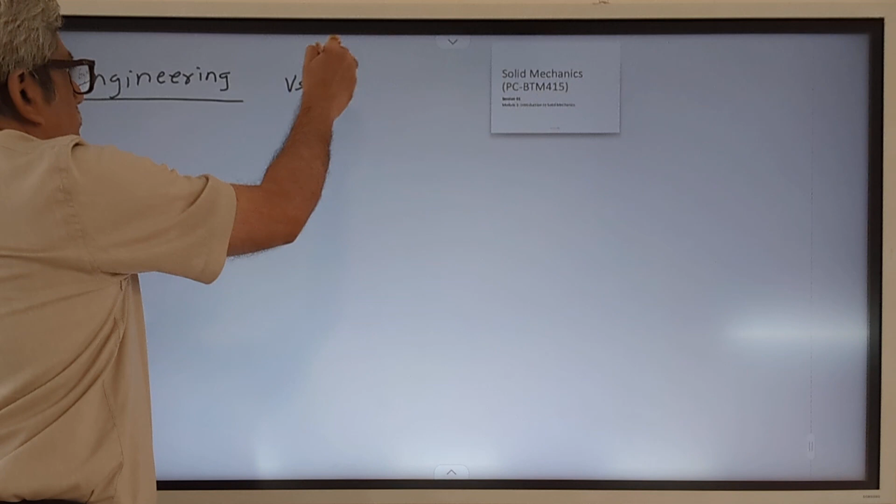So to make you think clearly, let's compare engineering versus any other profession. Let's take for example a chartered accountant. So how is an engineer different from a chartered accountant? Both are professionals - you are engineering professionals, they are finance professionals. So what is the difference? What do you learn that is different than CA? For example, a CA could be anybody. What can a CA not do that you can do, or what can you not do which a CA can do? So here we will focus on what you can do rather than what you cannot do.

Anyone who has joined and done 3 semesters, that is almost 1/3 of engineering. So what does an engineer do? You can design a machine. That's right. Okay, what else can you do? Here we are talking not about mechanical engineer, but engineering as such. We'll come to mechanical engineering after that, and after that we'll come to solid mechanics. So first we should know the top level. So engineers can design, that's correct. What else do we do?

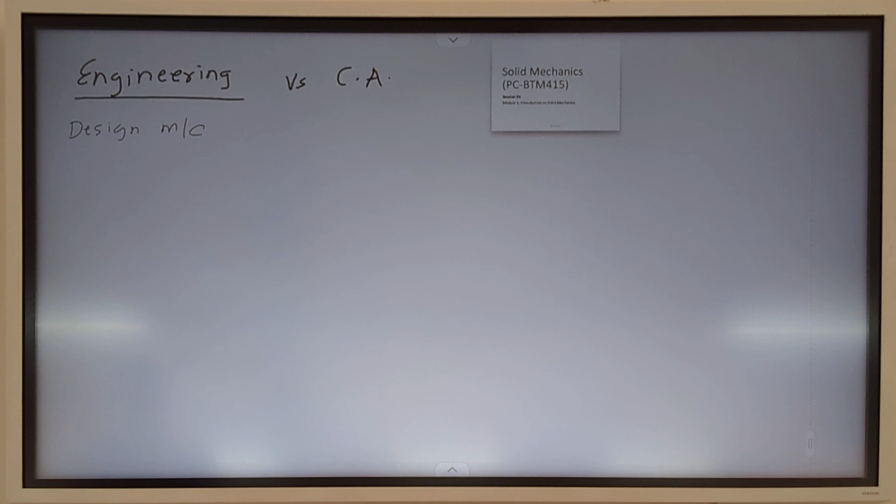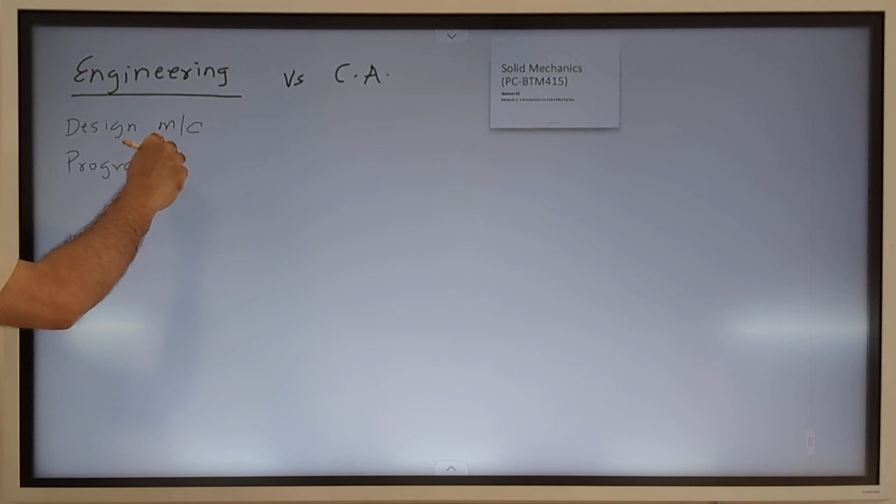Programming we do. Okay. Nowadays programming is a skill. If you call it a skill, it is across all disciplines. Here also we need programming.

So what do you deal with and what does the CA deal with? As I said, designing machines - we are dealing with machines. What else does an engineer deal with? If you go to some engineer, like I am an engineer, a senior engineer, so what do you expect me to know? Okay, so you should have knowledge about the technologies. Okay, what else? We cannot spend more time on this, I thought this would quickly go through. But anyway, if you have never thought about what an engineer does, then it is the right time now to think about what you are supposed to do after you graduate.

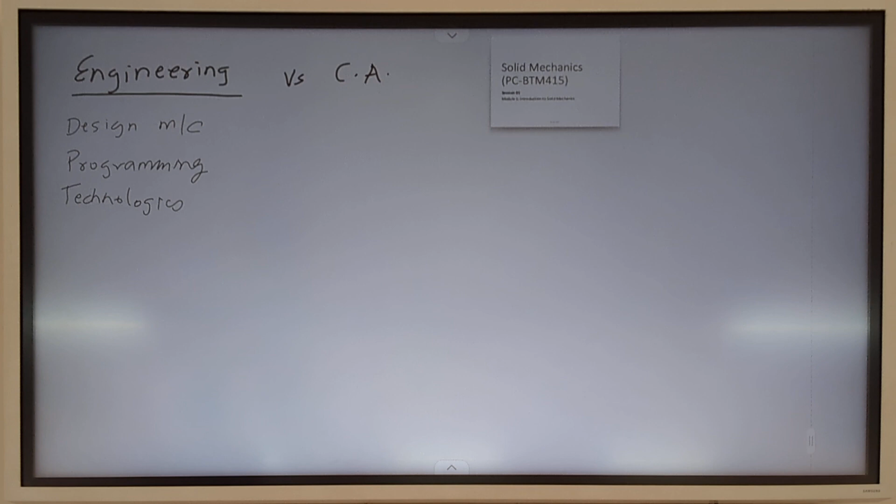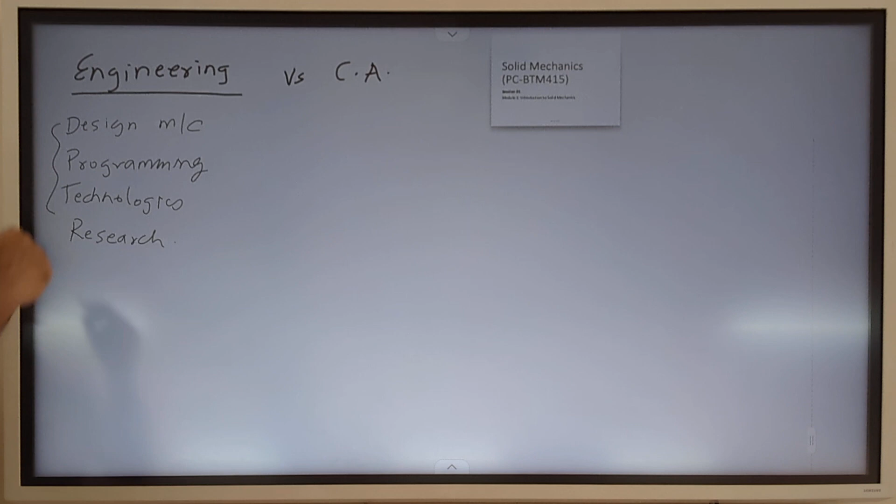Construction, that's an important part. So the main part which an engineer does versus a CA is what she has just now told - that we build something. So what differentiates an engineer from others is that engineers are supposed to solve problems and build something. We are not giving advice as to how to save tax or how to increase profit or how to study economics so that your business prospers. That comes in the purview of accounting professionals. Whereas we are into problem solving which is technical in nature rather than financial in nature. Both are equally important, but here as an engineer we deal with technical problems and finding practical solutions to them. So not only solutions, it means you have to build some device. So any engineer - computer science, electrical, mechanical, or any branch - they will be doing this practical building or construction, what she has said.

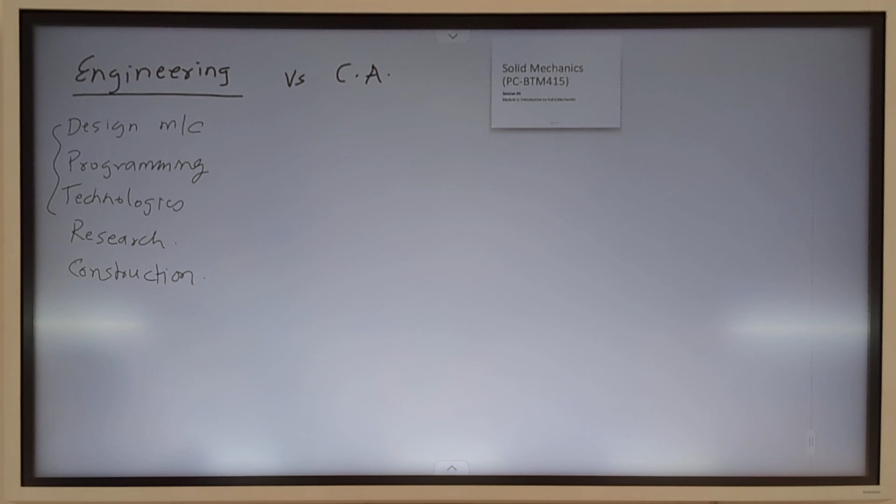Okay, now let's come from another point of view - what somebody thinks about what engineers do. Okay, so we'll move to mechanical engineering. Let's consider a mechanical engineer versus, for example, an electrical engineer, because the demarcation is easy to understand. So what do you as a mechanical engineer do which differentiates you from the students sitting in the other classroom? Okay, so you deal with machines. All right, here.

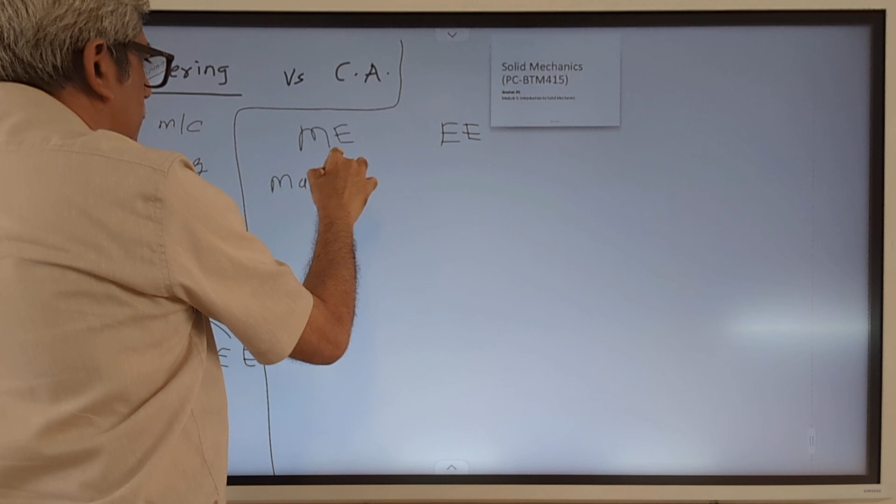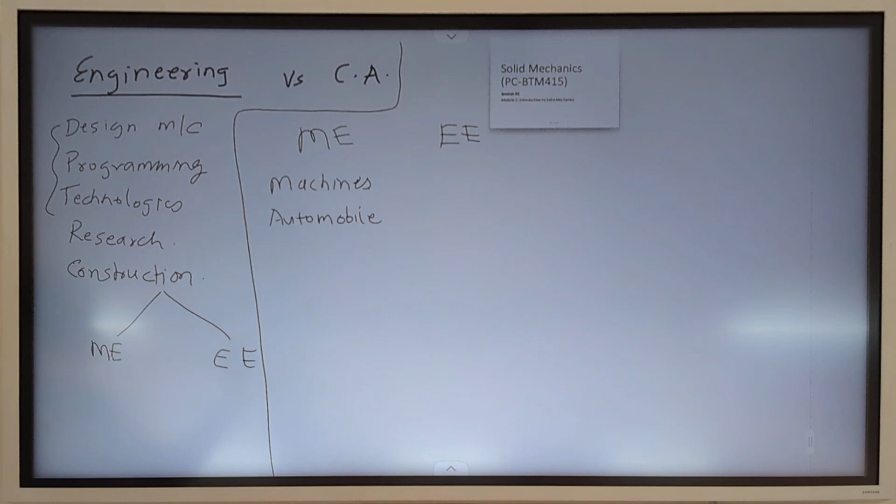Okay, what else? So machine consists of many things. Automobiles, okay, so is that not a machine? We deal with different types of machines including automobiles. What you said is correct.

Manufacturing, that's very important. As a mechanical engineer, one of the most important knowledge that you must have is manufacturing. In order to qualify as a mechanical engineer, you must have sound knowledge of what are the different ways in which you can manufacture something. When you talk about a machine, that machine can be manufactured in different ways. So what are the different ways of manufacturing is an essential skill. That's why you have learned already, I think you have covered that in last semester.

So if you look at subjects in the third and fourth semester of any engineering branch, they are the essential skills that you should have. So just go through what subjects you have done in the previous semester and tell me what skill it corresponds to.

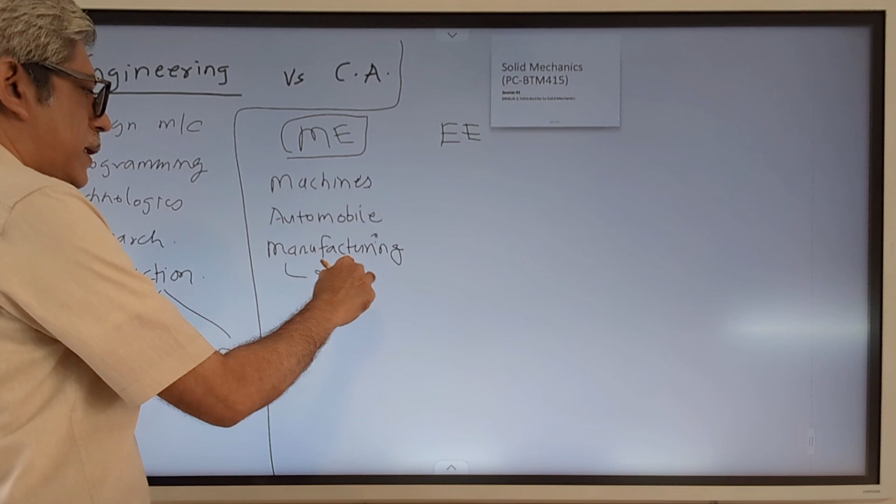Inspection and quality control, usually it is linked with manufacturing. Yes, that is quality control, quality assurance. You must have studied them in the same single course, right? Manufacturing.

Selection of? Okay, so structures and materials are different things.

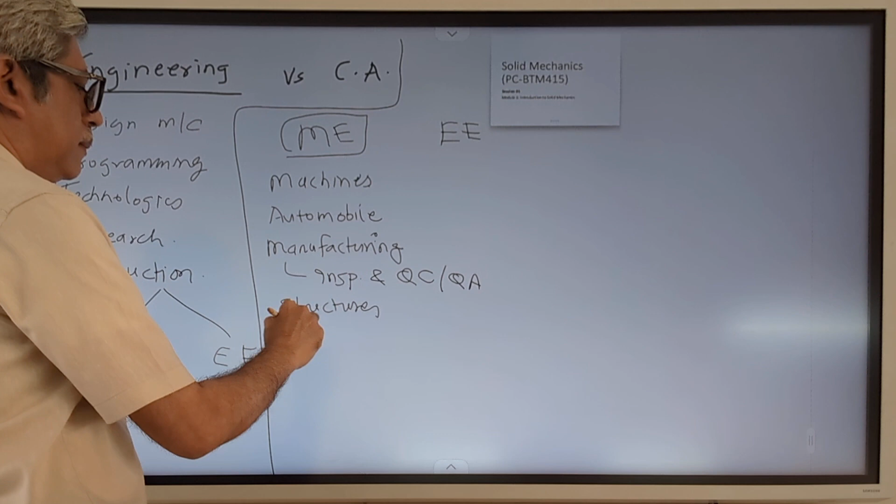So we take an automobile or car as an example. So in a car, what is the structure and what is the material? Yes, let's illustrate this point.

So what kind of material is used in a car and why? Is there a single material used in a car or are there a variety of materials? Okay, so is there any logic in that variety of materials? Why is steel not used for all components?

A mechanical engineer should have a sound knowledge of materials which are being used in most machinery. A civil engineer should have more sound knowledge about materials which are used in buildings, and an electrical engineer similarly in electrical machines.

What is structure? So in a car, what is the structure? What knowledge of structure should a mechanical engineer know? Okay, so in the case of a car, what beam knowledge, what do you consider as a beam, and what knowledge is required? Is there any beam in the car? No beam.

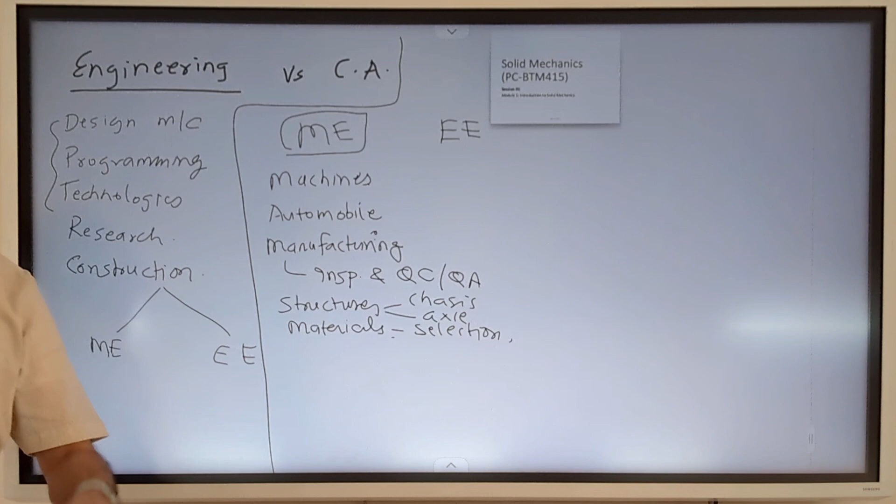So these structures could be, in the case of an automobile, a chassis or an axle, the various parts. So there are different parts and how to deal with them. So which subject have you come across that deals with designing of different structures?

So you said beams. Beams, from where did you learn that name? Strength of materials, so that's right. So that is a subject close to what subject they are going to deal with. We'll come to that.

But there are many other pieces of information or knowledge that you require as a mechanical engineer. So what are the other core skills of a mechanical engineer? Those are the subjects that you are learning. So strength of materials we have covered, material science we have covered, manufacturing science we have covered. What other subjects are you learning?

Machine design you are going to learn in the future, so that is an applied course. Kinematics and dynamics, so what do they deal with?

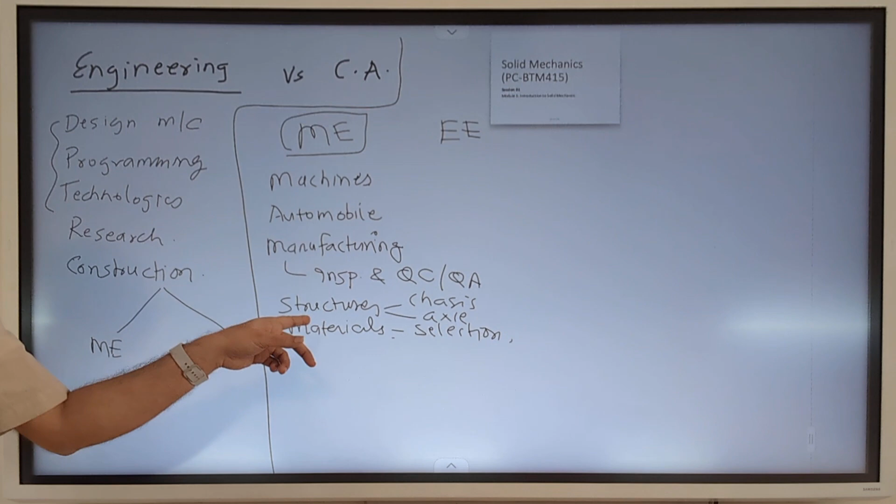So structures are dealt with by strength of materials. The selection of different materials is dealt with by material science. Manufacturing techniques are dealt with by manufacturing science. So KOM and DOM you will be learning next semester.

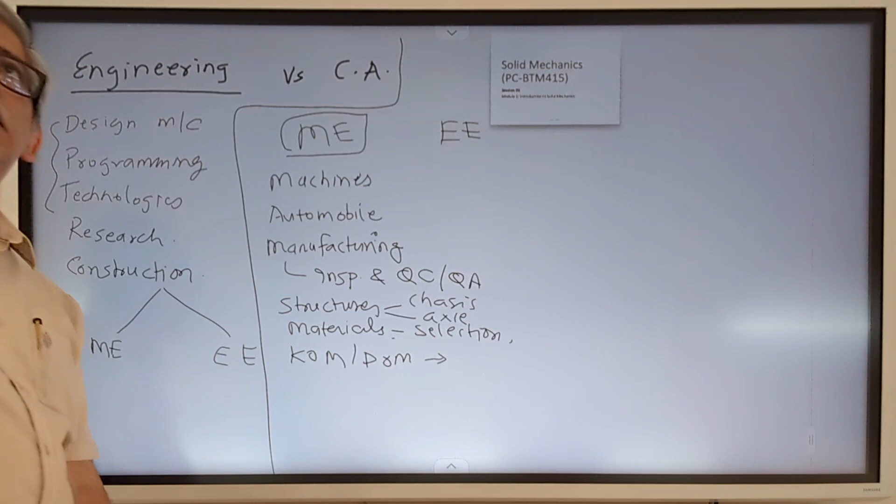So what do they deal with? Which is also a very important part of mechanical engineering knowledge. So what do they deal with? Kinematics and dynamics.

Which is a very essential skill that a mechanical engineer should have. So if you have to design this bench, then do you require knowledge of KOM and DOM? Which object in this room will require knowledge of kinematics of machines or dynamics of machines?

Fan. So what is the difference between bench and fan? Moving. So most of the machines here have some moving parts, some stationary parts. Any moving part is there, you immediately get into the behavior of that part. The behavior of the fan blade is different than the behavior of the bench on which you are sitting. Their purpose is that when somebody sits or jumps or dances on the bench, it should not break. Whereas for the fan, the requirement is different. It is already dancing, so you have to find out how to deal with that. That is the subject you will be learning or partly learn.

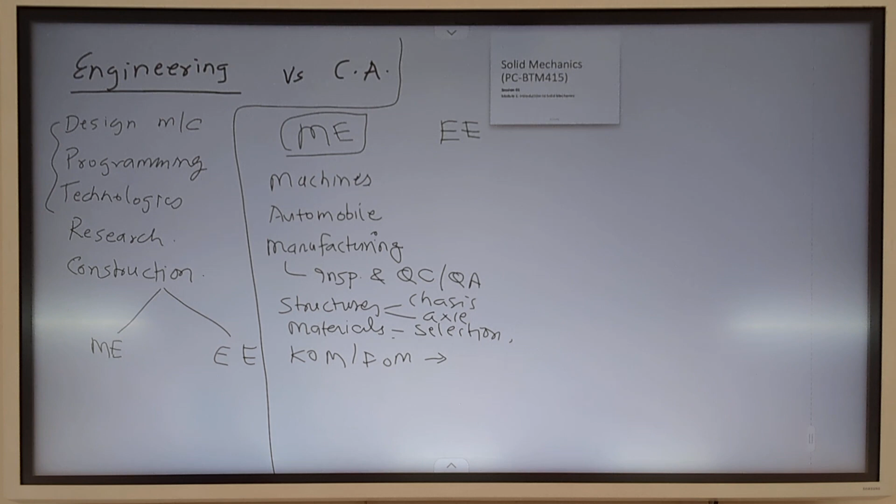Any other subject that you have skipped? Thermodynamics. So thermodynamics is a very important part of mechanical engineering. So it deals with what? Like we said, motion we have done, structures we have done, materials we have done. So thermodynamics deals with what? What is the heart of thermodynamics, or the subjects related to thermodynamics?

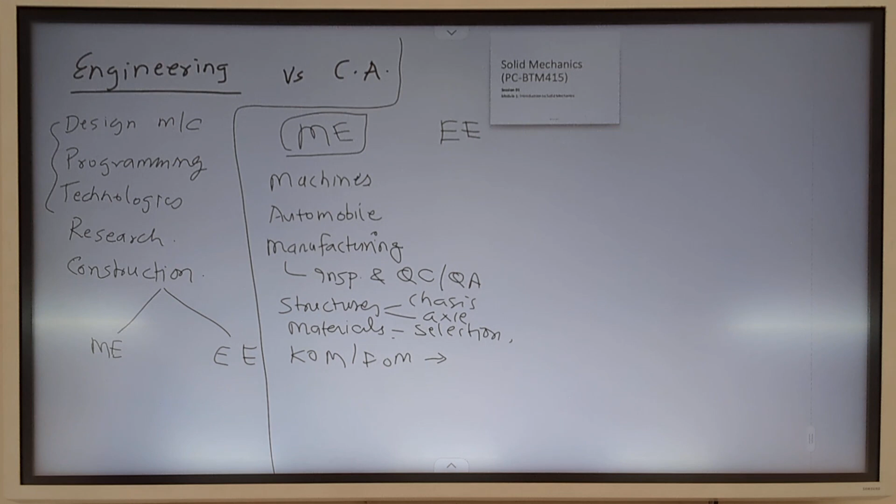Fluid mechanics. Fluid mechanics and heat transfer. So you have to deal with fluid and heat. Usually they come in what type of machines you require fluid and heat transfer, or heat as a concept. Power plant is a much bigger example, but anywhere you require power, whether large amount or small amount, heat transfer always comes there in some form or another. So when you are dealing with heat, it is just another form of energy. So you require to deal with energy with this subject. Any other subject we have missed?

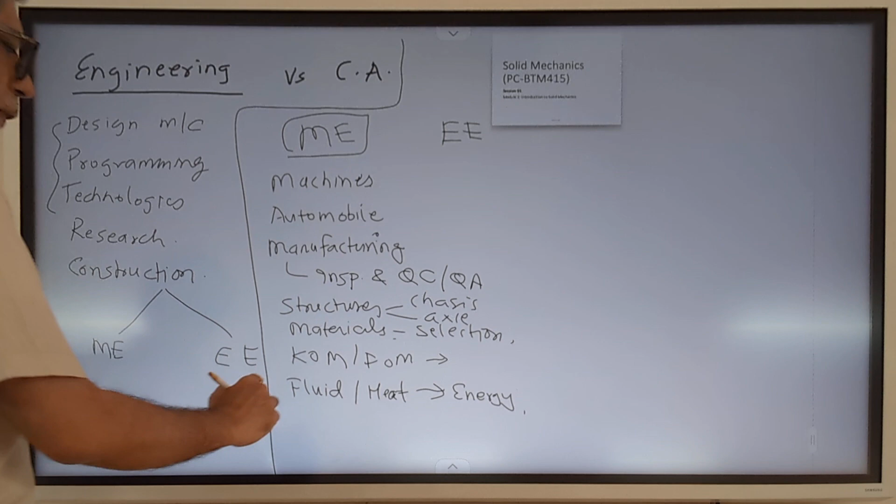Drawing, that's right. So that is very important. So drawings deal with what? All these subjects talk about some skill. So drawing is a skill for doing what?

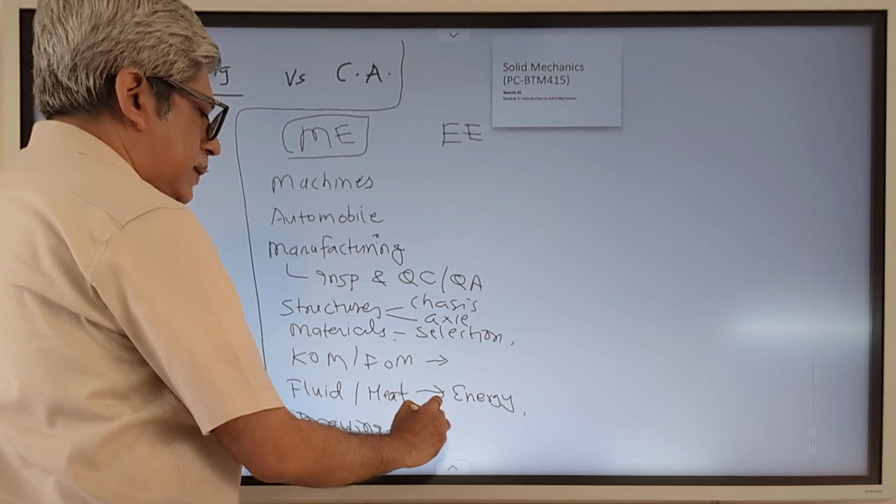Visualizing a product, that's right. So it is visualization. But you are not using it for your own visualization, you use it as an aid for what? For the manufacturer. So essentially it is visualization that you make easy for a manufacturing person, provided he also knows the language of engineering drawing. So if you give your mechanical engineering machine drawing to a computer science engineer, he will not understand it because he has not learned that language. So it is essentially a language of engineers, a specialized language which only engineers use.

So mechanical engineers have got their own symbols and other things which we will be learning, I think in fifth semester. That is an important part of your skill set as a mechanical engineer. So what else? Have we covered all your subjects? Five subjects in last semester, five subjects in this semester.

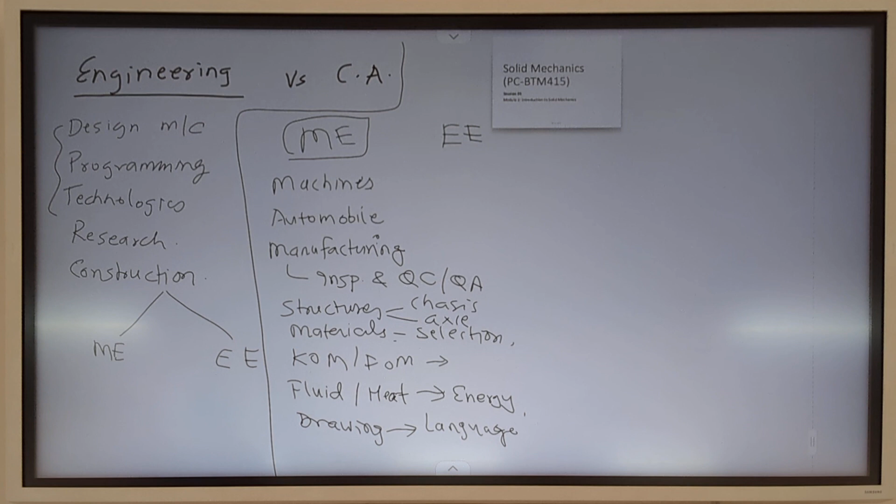Okay, so now we'll come to our subject, solid mechanics. Solid mechanics, as I said, is very similar to the subject which you have learned before, that is the strength of material. So tell me, out of these skills that we have seen here...

So if I ask you the question, strength of material, is it related to each of these points? Let's tick them. Is strength of material related to machines? How is it related? How will it help you design machines, strength of materials? What way will it help you? Tell me some formula or some concept of strength of material which is useful in machine design, or doing some checking for the machine.

So you have the ceiling fan, we have a live machine in front of us. Which part of this fan can you analyze using your concept of strength of material? Okay, so there is some electric motor which is supplying torque, and that torque is used to churn the air, that is the fluid around it. It requires some amount of power, and that is transmitted through the motor shaft to the main hub. So you can use a torsion formula to find out the size of the spindle which will transmit the power from the electric motor to the main hub. Okay, so that is good.

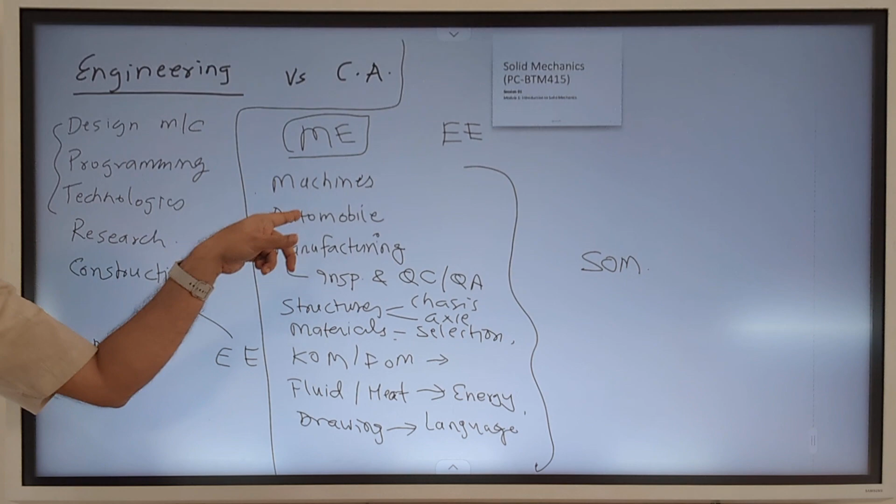So some concept what you have learned, you can apply to some real life problem. Automobile, similarly we can discuss about. So machines, automobile, I am just keeping it together. So is strength of material knowledge linked with manufacturing in some way?

So in a world, everything is interrelated. We cannot separate one thing from another. Here we are talking about strongly related or weakly related. So strength of material, definitely it is related to manufacturing, but is it strongly related or weakly related?

Can you give some example where you can use strength of material in manufacturing? Or any machining process used on a particular material, if that material cannot bear the stress induced upon it by that machining process, then it will break and the yield will not be obtained. What will not be obtained? The end product of that.

Okay, yield will not be obtained if the actual cutting, if I understand you correctly, the cutting has to take place before that product gets damaged. So where in machine strength of material, which concept is useful in machining process?

Properties, that's right. So in strength of material you use various material properties. So how is hardness related to machining?

So you have done some machining in the workshop. So how is hardness related to machining? Depending on the hardness, which is easier to machine? Softer material or harder material? Softer material is easier to machine in general. If it is too soft, then also there are some other problems.

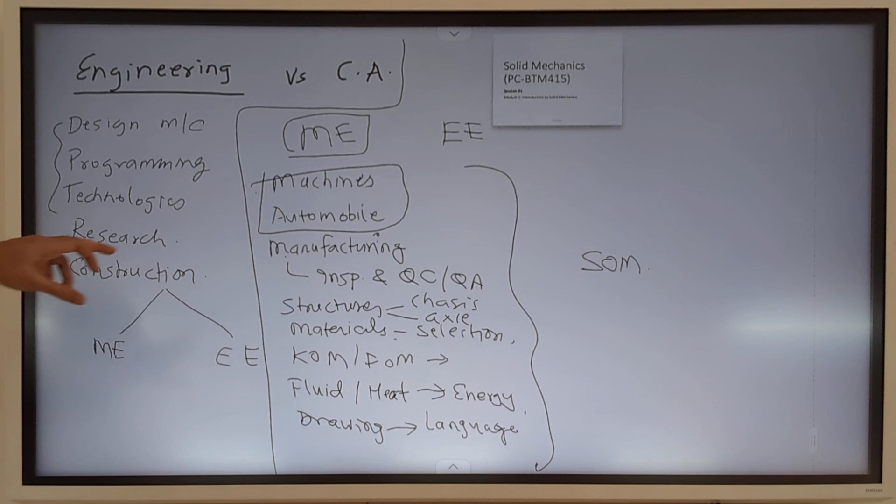I think you must have done at least a virtual experiment, if not the real experiment. Anybody recollect how hardness is measured? There I used the Brinell hardness number to calculate. That's right, so you already know that. So BHN or Brinell hardness number is one of the units. There are other units also like Rockwell hardness and so on. So that is one example of how strength of material gets related to manufacturing. There are many more, but for lack of time, we will limit it here.

Structures. So what different types of structures, at this stage, using the knowledge of strength of material, are you able to analyze?

So if I have to design this table, what parts of this table can you check? If I tell you that you have to design this table so that 100 kg kept at the center, it should be able to withstand, how many components can you analyze in this table using strength of material?

If I put a central load of 100 kg, do you know how to design this tabletop? What should be the thickness of this tabletop? How will you do that calculation?

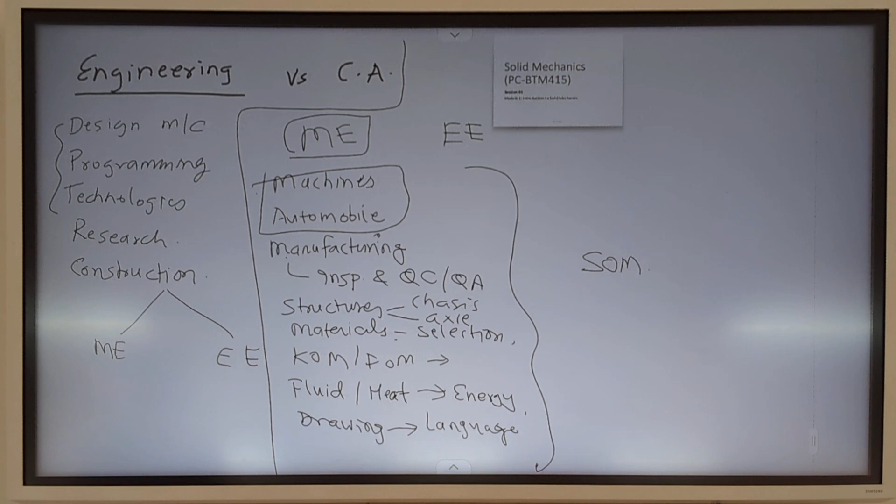Okay, if you keep 100 kg at the center and you have to design, what should be the cross section of this leg? How will you check the cross section of this leg? If you are not able to do that, then you have just learned the formulae, but you are not able to apply them.

I am sure many of you know, but you are maybe reluctant to speak out. So the leg is simpler than the tabletop. How do you design this leg? How much load will come on each of the legs if I keep 100 kg at the top?

If I exactly apply 100 or 1000 Newton at the center, how much load will come on each of the legs? 250. It is symmetric if I keep it exactly at the center, otherwise it will change.

And how will you check whether it can take 250 Newtons? Compressive strength. So you have the concept of something called induced stress and something which is permissible stress. So you can calculate, using what you have learned in strength of material, how to calculate the induced stresses. So what formula will you use to calculate stress in this leg? How do you calculate compressive stress in this leg?

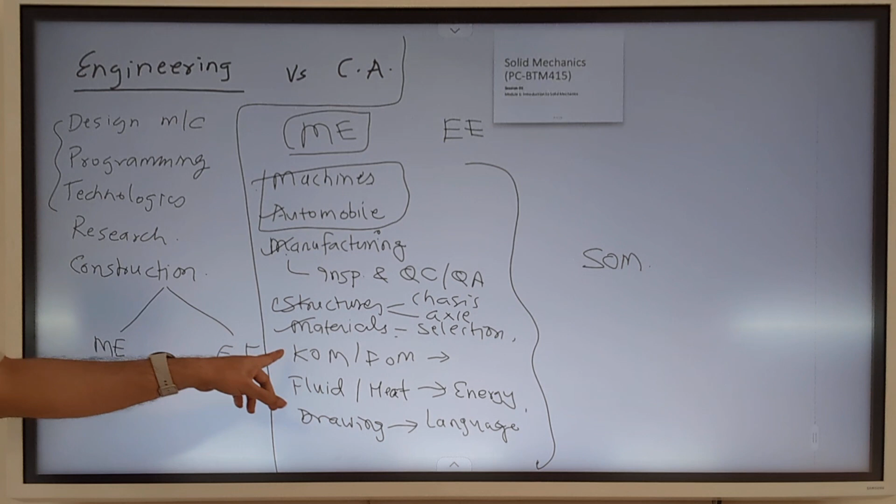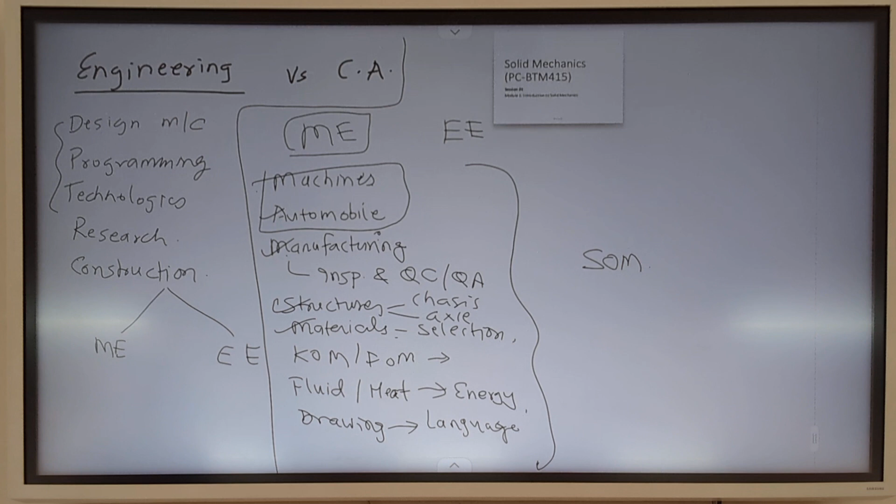Kinematics and dynamics - so where does strength of material come in picture? There is no direct linkage with respect to kinematics. Ultimately what you do in dynamics is, when a body is in motion, there are inertial forces that get generated. In static, like this bench, there is a static load. Whenever there is a dynamic load, it has to be converted into its inertial load, and for that load you have to calculate using the same approach. So you convert a dynamic problem into an equivalent static problem.

Like this fan is whirling. So on the blade of the fan, there is a gravity load which is a static load, and there is a dynamic load that acts on this blade. You have this blade which is spinning about the central axis. So what is the dynamic force which will act on this blade? Which you learned in your first year engineering mechanics - what is that force called? Centripetal and centrifugal force. So how do you calculate the force which is acting on a blade?

What information will you require? Velocity and mass, of course you will require. So m omega square r, that will give you the centrifugal force. Once you know this force, you know that this blade is subjected to a radially acting axial load, and then you can calculate how much stress will be generated. So that is how you will deal with kinematics.

Fluids and heat transfer, again it is an indirect combination. Whenever you are dealing with, let's say, an IC engine, an internal combustion engine, there are some moving parts. In order to design those moving parts, you require knowledge about how much thrust is thermodynamically getting generated, how much pressure is getting thermodynamically generated. So you require the knowledge of whatever cycle is undergoing there, and corresponding to that, the engine body should be able to withstand that pressure and temperature conditions.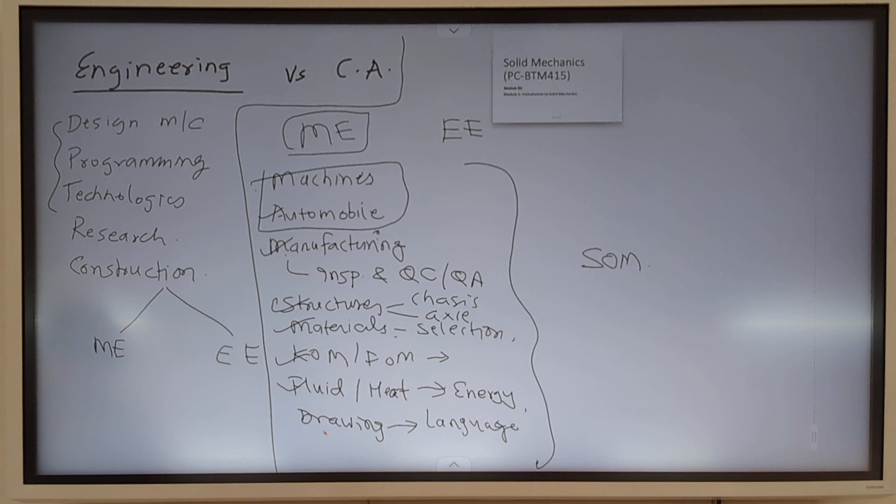So that is a higher level application of strength of material. And drawing is not per se belonging to any particular subject - it is a language for communicating the engineering concept from one engineer to another engineer, or one technical person to another technical person.

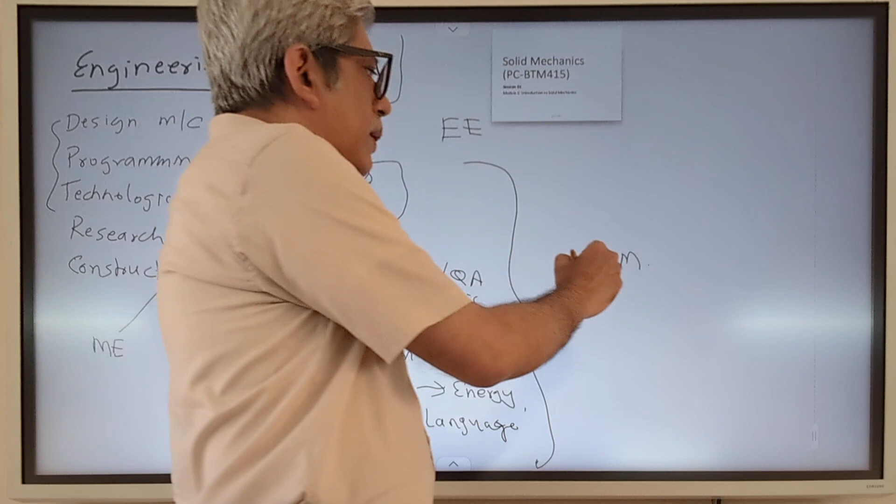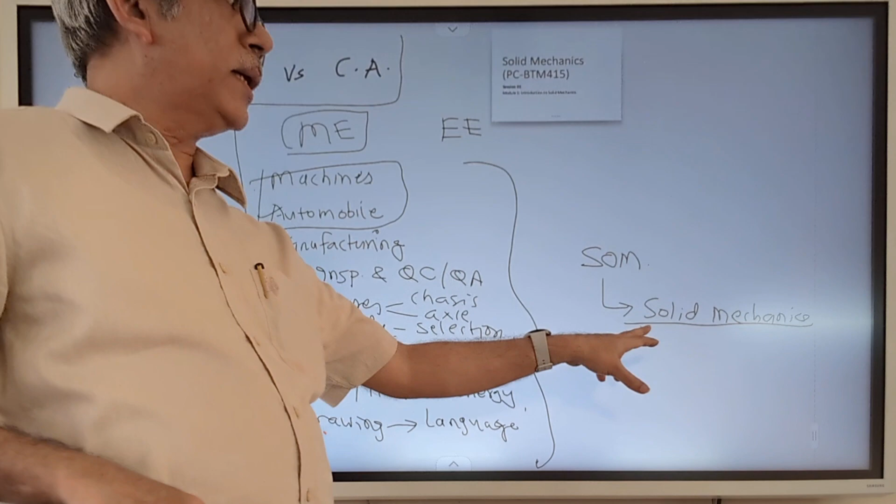Okay, so having seen the strength of material, it is linked here. So what we are dealing now is our subject, solid mechanics. Solid mechanics is an extension of strength of material. Just like strength of material is linked with all the basic mechanical engineering parts, solid mechanics is more of a generalized approach.

For example, if you have to use strength of material to calculate what is the compressive stress in this particular leg, you have to consider the force divided by area. In most of the cases, you consider this particular part as a part with uniform cross-sectional area, and then you can calculate what is the stress. If it is uniformly tapering, then also you can calculate the stresses.

But let's say that this particular leg has got some notch into it - not this vertical slit, but there is some horizontal notch which has come here. Something has hit it and some portion has been removed, so there is a notch into that particular part. The pure strength of material will not give the answer as to what will happen around that particular notch. Solid mechanics is a general approach which will allow you to find out what should happen around that notch.

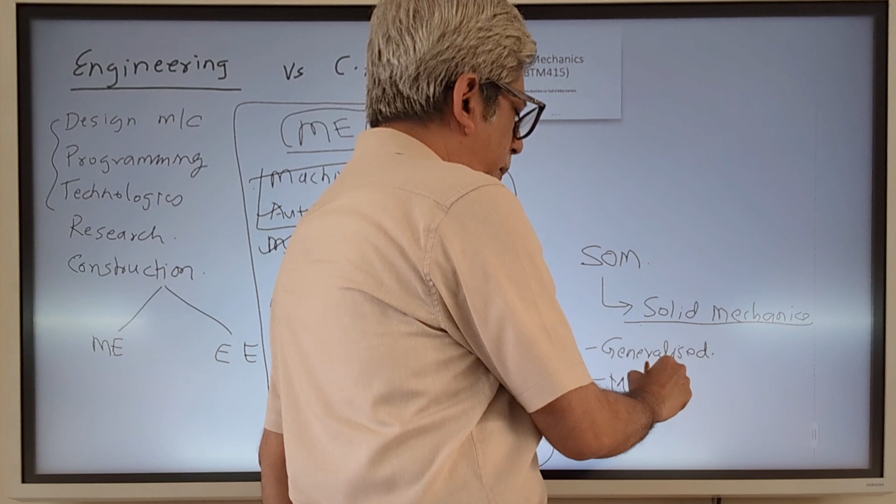So that is one example of what I mean by generalized approach. The second aspect of solid mechanics is that generalization allows you to make a mathematical model of an engineering problem. This is a very important skill, especially for those who want to do more advanced work in engineering, post-graduation work, or specialized design of new components or innovation. There, you cannot use the standard design formula, the standard textbook formula.

So you need to devise your own methodology to deal with that component. Suppose this particular leg, instead of having a uniform cross section, is a twisted bar - you take a plate and twist it, and you get a spiral plate, and somebody wants to use that spiral plate as a leg for some fancy reason. What will happen to the stresses in that spiral leg? That spiral, how to calculate stresses in it is not given in any textbook, or most normal textbooks will not give it.

Solid mechanics will give you an approach: if the geometry is something like that, how do you write the basic equation which governs that particular geometry and solve it to get a solution? The approach here is more about converting a physical problem into a mathematical model, solving it mathematically, and then relating it back to the real life situation. So we'll see some examples of this particular approach in this subject.

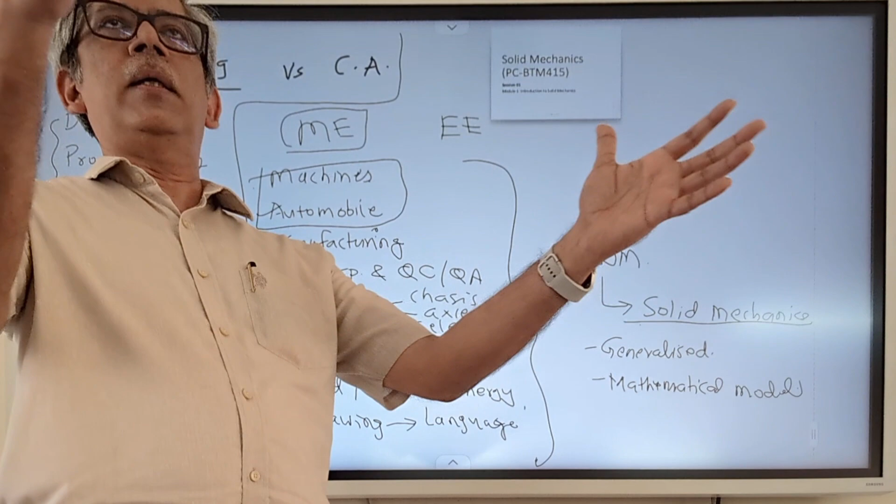Don't get scared by the mathematics term appearing here - it is not very high order mathematics we are talking about, it's routine mathematics. Even if you don't understand the mathematics approach, you can appreciate the beauty that something physical can be converted into symbols, and those symbols can be converted back into physical life properties.

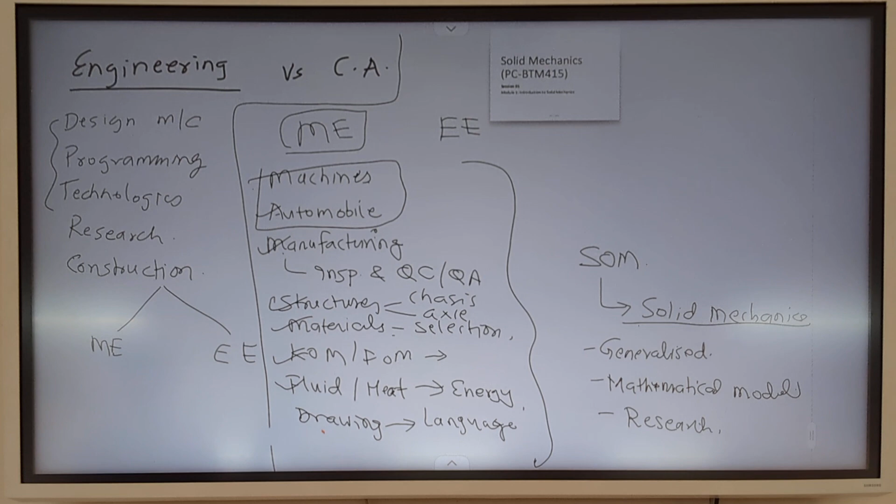This particular subject is more research oriented, so it gives you skills to go deeper into a subject. Strength of materials - I'm not saying it isn't deep, but as you learned it in third semester, it is surface level knowledge. If you want to go deeper, how those formulae came about, or how they change if you make some changes - like if the support leg is a spiral plate, how do you calculate stresses in that - with this subject you will get at least some direction to think, or know which book to open to check that particular thing.

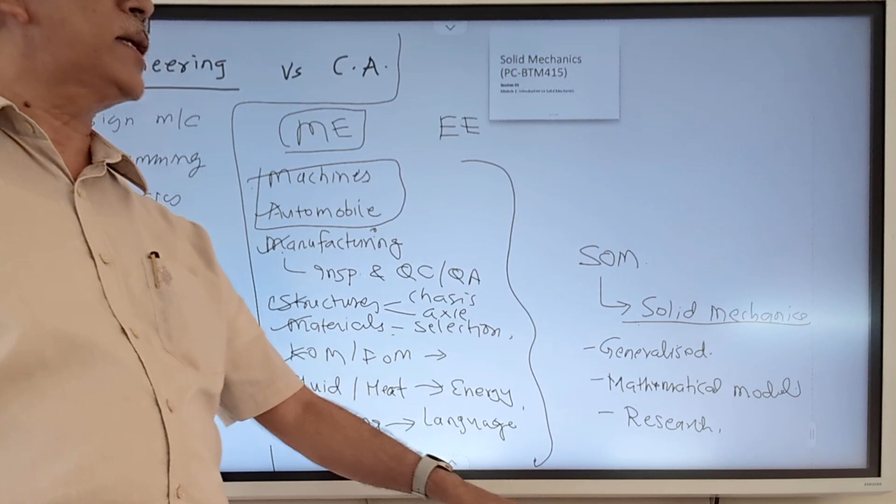So those are the three major differences between strength of materials and solid mechanics, and in this course we will be dealing with this more often. We'll first quickly go through some of the applications of solid mechanics, which are also applications of strength of materials, and then we will look into the content of this course, and then we'll close today's session.

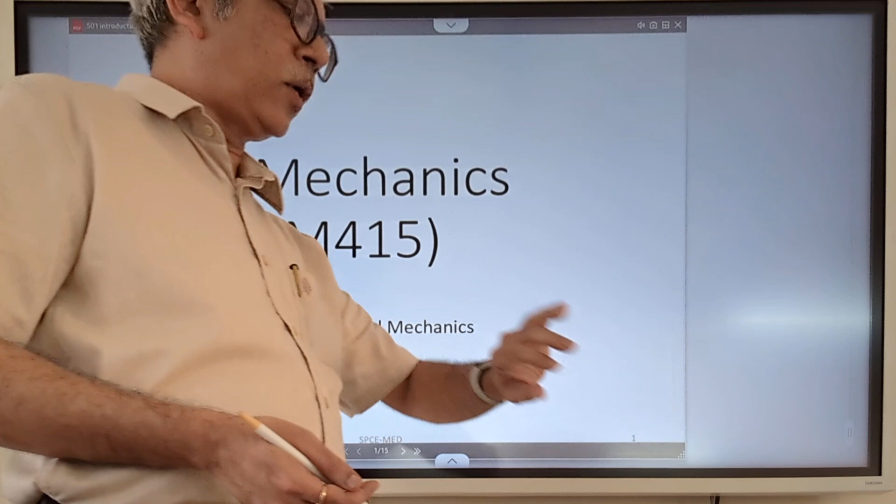Okay, so we have discussed this particular part previously, so I will go ahead. The difference in focus from strength of materials to solid mechanics is that solid mechanics looks into more generalization of bodies - rather than looking at beams and columns, we'll look into an arbitrary shape. The shape could be that of this water bottle. How do you find out what the stresses are in this bottle? For a circular bottle, you have learned what hoop stress and cylinder stress are, but how do you deal with a general shape? That would be given by this.

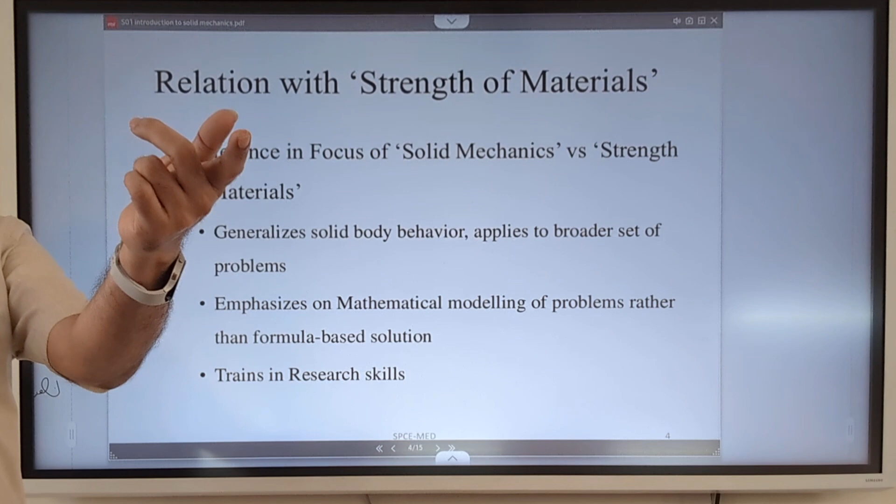As a corollary of this, to deal with generalization, one needs to know how to convert, for example, this bottle into its mathematical model, the solution of which will give us the stresses in the wall of this particular bottle. If I pressurize this with some pressurized fluid, this bottle should be able to withstand it. That is a very common application in many engineering applications. This particular course will give you this skill, and to a very elementary level, it will allow you to go into research skills.

So here research doesn't mean technical research, although this course is technical. A basic approach of any research—managerial, economics, or biology—is always to find or abstract what is real into some symbolic or abstract model, and then deal with that model with the knowledge that you are having.

It need not always be a mathematical model, but as engineers we strongly depend on mathematics as our abstraction language, where you convert, for example, your bending stress formula as M*y/I. That is a very simple mathematical abstraction of the bending stress phenomena.

So how do you train yourself to look into problem solving in that particular approach? Whenever you go out to industry, nobody is going to ask you to do that, especially in today's era where AI and machine learning are so profusely used.

So most likely by the time you graduate, they will not employ you to do bending stress formulas. Like my generation, they depended on humans to do bending stress and torsion calculations. By the time you cover 4-5 years of your graduation, this will most likely be taken over by automation or artificial intelligence, because these are very simple and don't require human intervention.

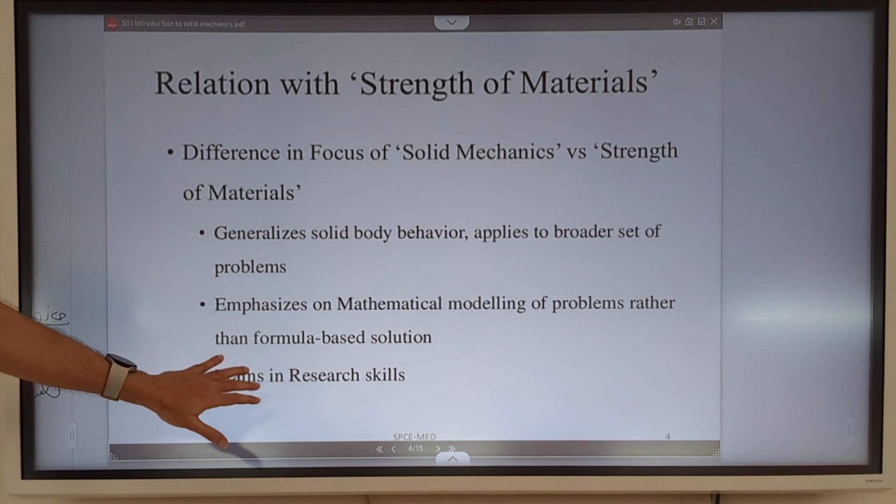But where you differ is creativity, and in order to channelize that creativity, you require the skill to convert a physical problem into a model which can be solved. Then you can submit that model to artificial intelligence, and it will give a solution quicker than a human can. But that step of converting a real life problem or problem statement into a model is what you will learn in this particular course.

Okay, let's take an example. So what you see here is a plain workshop vice. Where do you use this? You must have used it somewhere in the workshop. For what purpose? Holding the workpiece, maybe for filing or for some operation you are doing.

So if you look at this component, what you see here is the main component, which is the load-bearing part—this power screw. As you tighten this handle and keep some workpiece here, it will clamp this particular piece. When you are clamping this piece, what is the nature of force which comes on this screw?

Will it be in tension or in compression? By common sense, what do you think—will the screw get stretched or compressed? If I have to pinch this particular part and you have a screw here, what do you need to do? Do you have to pull the screw or push the screw? You have to pull it, you have to stretch it.

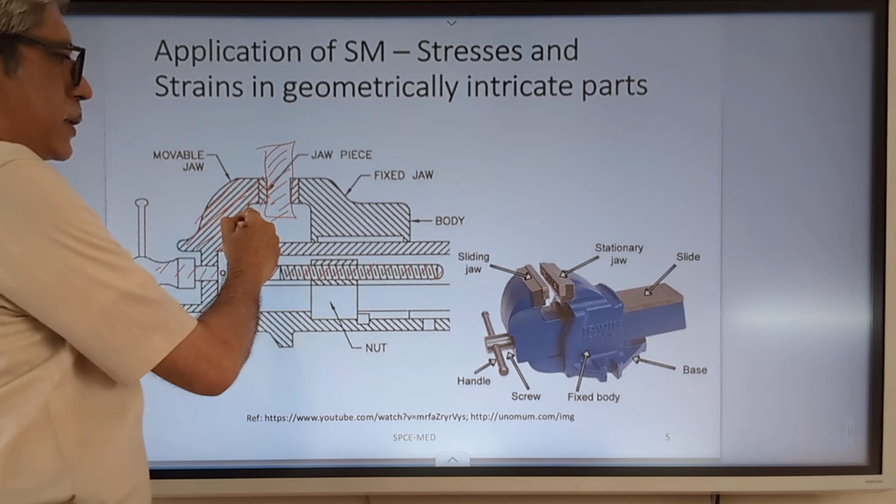So this particular jaw is shown here. If you have to size this particular component, somebody has given some size to it. If you have to check this component, you cannot use your standard knowledge of strength of materials, because the shape is different than what you have learned earlier.

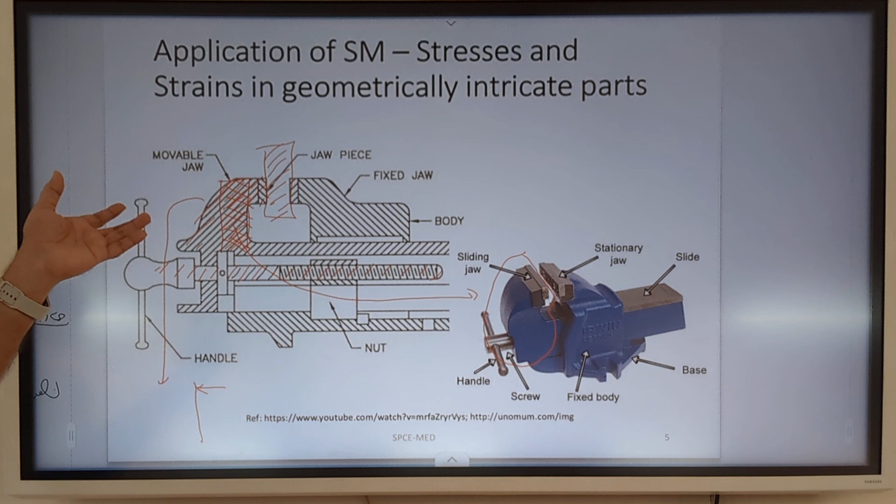So in order to design this particular part, you have to approximate it. Using the strength of materials approach, you approximate it as a cantilever beam. This particular part you abstract as a cantilever beam, and the remaining material you consider as extra material. Then if this plate can take the separating force, the jaw is okay. So that is an approximation.

But when you are doing business, or in some commercial application where somebody is producing thousands of these pieces, this approximation will give a very high thickness for this component, which will increase the cost. So somebody would like to optimize.

So what is the best shape this particular piece can take? That can be found out with advanced stress analysis, which generally people do using numerical techniques such as finite element method. The base of that finite element calculation or stress analysis is the knowledge of stress state, which you are going to learn in the next lecture.

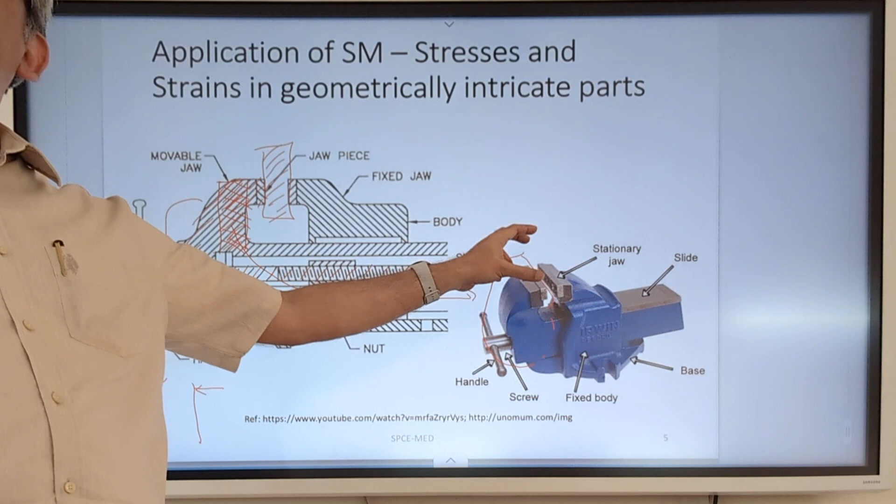Also for a vice of this type, another important part is the deformation of the part. So why do you think these components are made so thick? They are not made so thick just for the purpose of stress. From stress point of view, you could have made them much thinner, and the stresses would still be within the yield strength. So why do you think these components are made so bulky?

There is another criteria which always goes hand in hand with stress. So along with stress, you use another term. So what is stress? Strain is related to what? The deformation of the body. So is deformation of the jaw important to you?

What happens if the jaw is strong enough to take the stress? Whatever clamping force is there, it can take, but it deforms under that force. What will happen if you start filing with this particular clamp, which is flexible? Will you be able to file it properly? As you apply the filing force, the entire jaw will start shaking. So we require a rigid structure.

So the subject of strength of materials as well as solid mechanics deals not only with stress, but the other important part is the deformation, which is normalized by the concept of strain. So after discussing stress, we will also deal with strain in this particular subject.

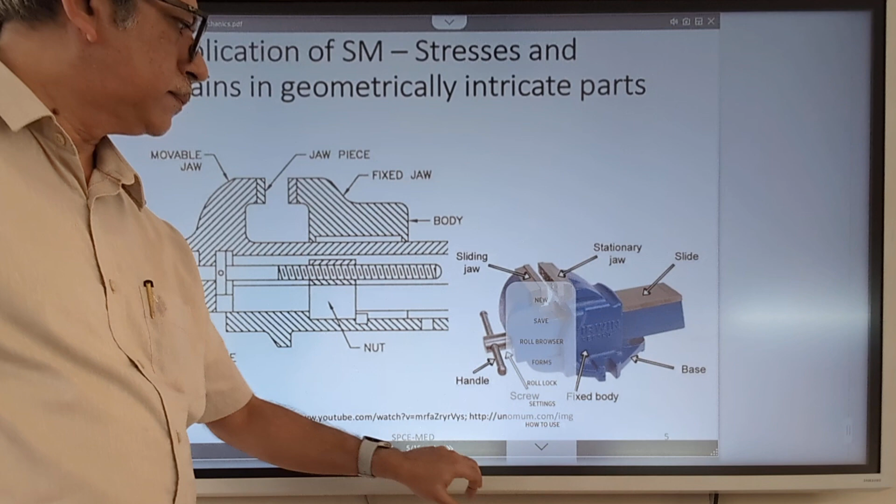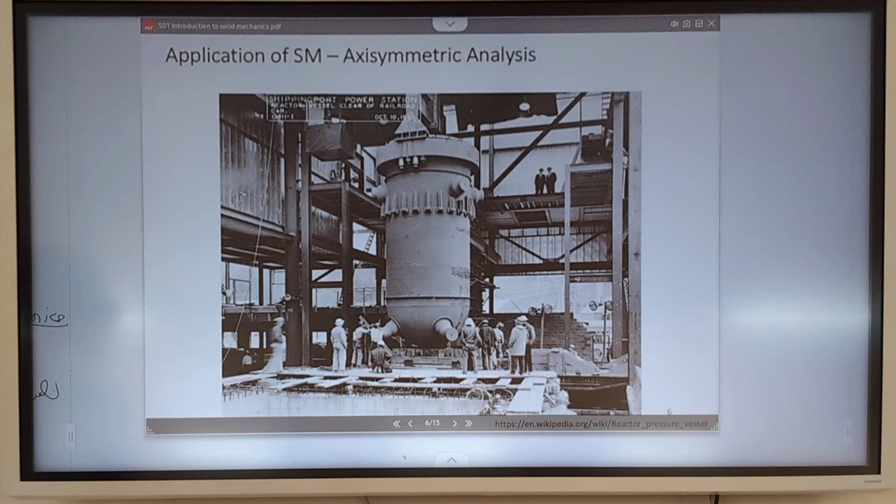You cannot take even a one in a million chance of failure of this particular component, because that is huge loss not only in terms of capital investment but in terms of human life and the society surrounding it. If you use the standard strength of material approach, you can design this particular cylinder using the formula of hoop stress, that is PD by 2T, what you have learned there.

But note that this particular cylinder has got some attachments, some cutouts, so there you have to pass on the water, take out the steam, so there has to be some cutouts made. What you see here is a cutout made on this cylinder. As soon as you make a cutout, there is a local weakening that happens in this cylinder. You cannot calculate the weakening effect using the simple strength of material approach.

So you need a more advanced tool, and that is the one provided by solid mechanics. Of course, in this course we will not be dealing with this level of complexity, but certainly that is where the application of solid mechanics lies in advanced machine design. When you are designing machine components which are highly critical, where you require extreme reliability, you require techniques which are sufficiently accurate.

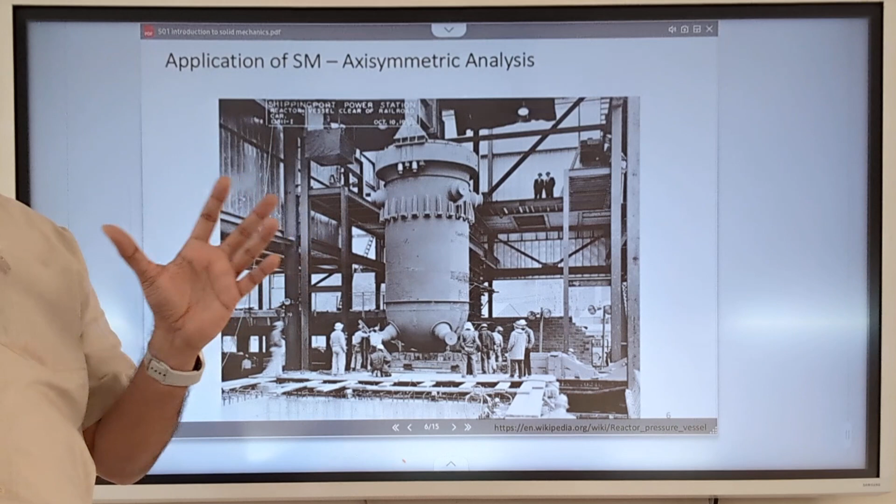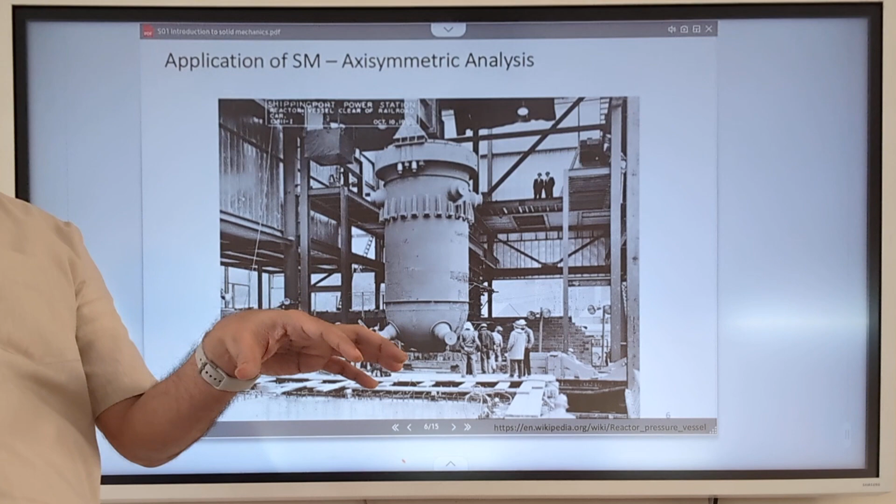So you can't depend on an approximate approach. You cannot deal with this as a simple cylinder, and because of the hole, you cannot just say you will increase the factor of safety. One simple approach is to double the factor of safety, making it equal to 4, but the customer, that is the nuclear power corporation, will not allow you to give such a vague answer. You have to prove that factor of safety 4 is sufficient for this application, using technical skill. For that, again, you will require the knowledge of solid mechanics that we will be learning here.

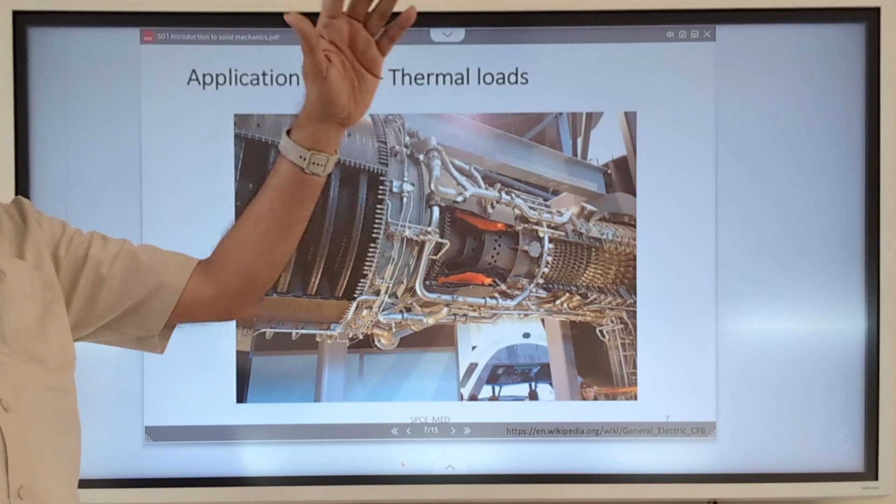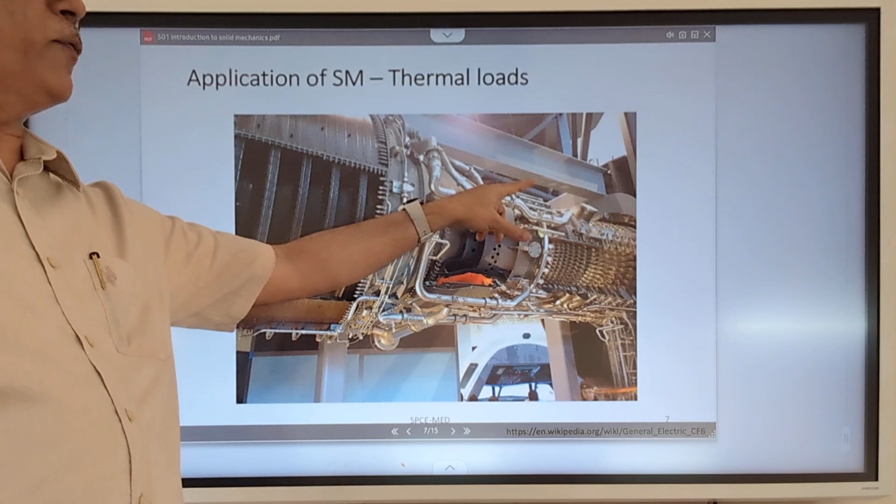This is the internals of a gas turbine engine. You will find there are many rotors and blade assemblies, and the aspect we are looking at here is different temperature zones. As the gas passes, there is change in temperature and pressure of the fluid as it passes over these blades. Because of the temperature gradient, you get different levels of thermal stresses that you need to deal with.

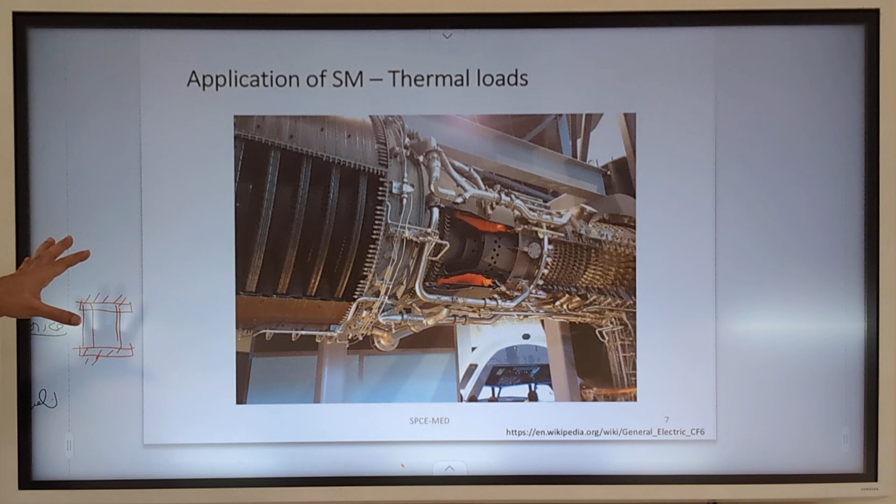In strength of materials, you've seen the example of two rods coupled together, fixed at both ends. If you heat them, both will get certain amount of stresses. So you know how to calculate stresses in this case, but for this complex geometry, how to calculate those thermal stresses needs to be understood by the approach of solid mechanics.

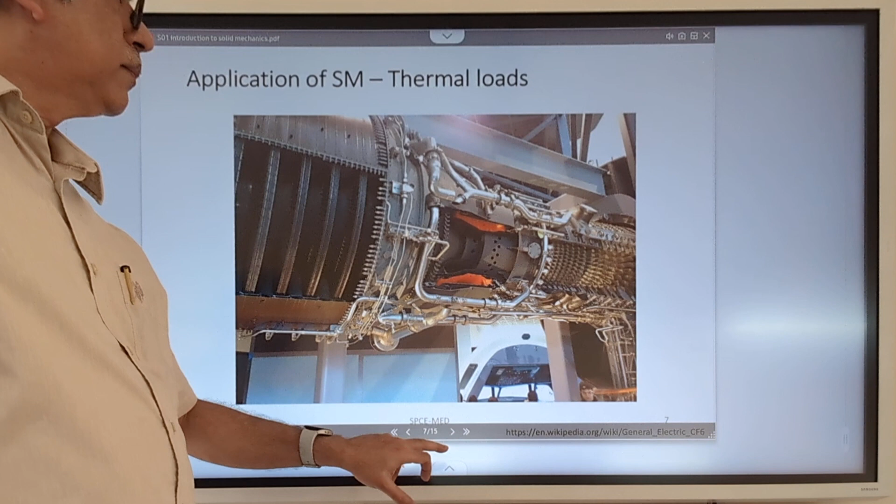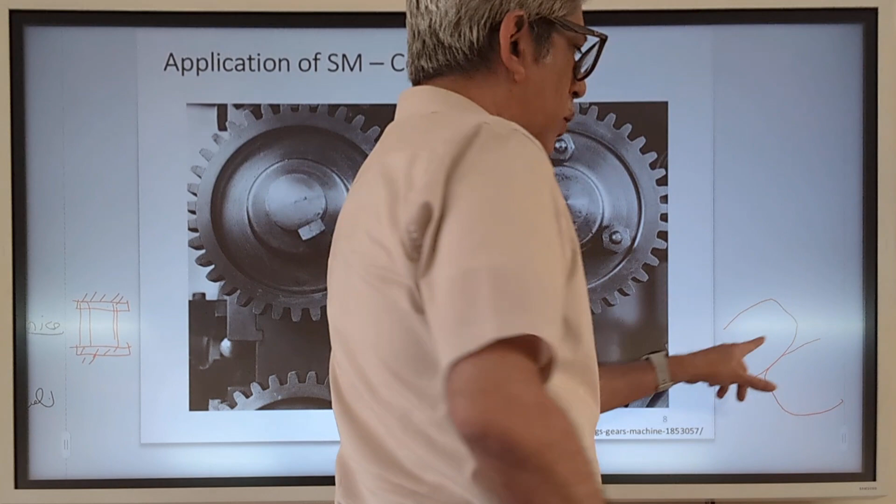Then there are many motion transmission or power transmission elements. Gear is one of the most major one. Whenever two gear teeth engage with one another, one gear tooth profile will have a specific geometry. Anybody knows what this profile is called? You must have learned this in engineering drawing. There is a specific name to this curve.

A cylinder rolling on another cylinder, you get a development curve. So what is that curve? No? You have forgotten, or you have not come across this?

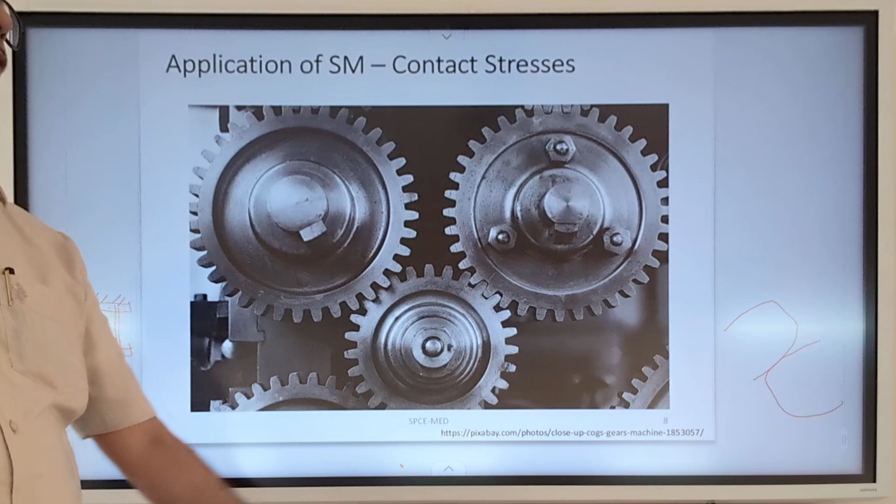Wrong is also okay, rather than nothing, wrong is better. Epicycloid is much more complex. This is called an involute curve. Epicycloid gears exist, but they are very difficult to manufacture compared to involute gears, so from a manufacturing point of view, involute gears are used. Cycloid and epicycloid gears are very difficult to manufacture, so in the old era they used to use cycloidal profile, but now they use the involute profile for ease of manufacturing.

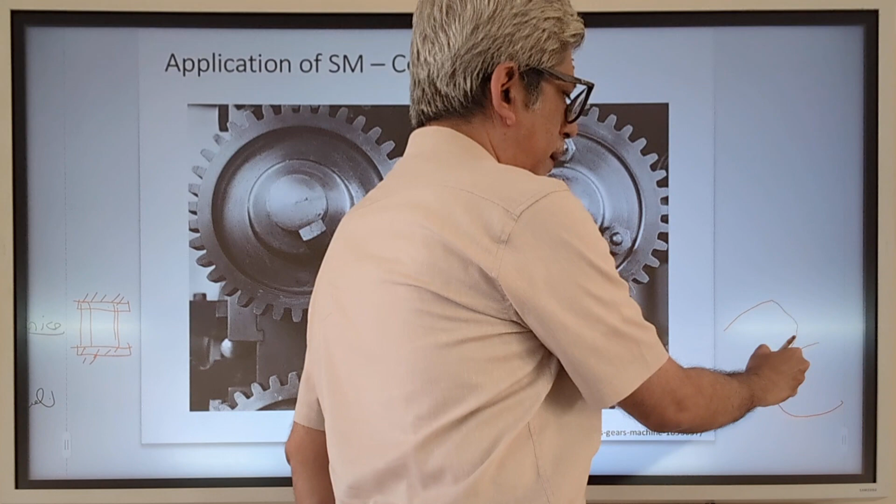The point here is whenever these gear tooth curves are touching each other, theoretically there is only a line contact between the two parts. So what is a line contact? That means the contact width is theoretically zero. So if you use your stress formula, force divided by area, since the line doesn't have any area, your stress will become infinite. These stresses are called contact stresses.

How to calculate these contact stresses? Using the strength of materials approach, you cannot calculate them. You have to consider the local deformation that will happen. Whenever high force acts at a particular line, that line no longer remains a line but becomes a surface. You get that flattened surface momentarily when they come in contact with each other, and that gives rise to what is known as contact stress. In this course, we will deal with contact stress and how to calculate it, which you will ultimately use in higher semesters for the mechanical design of gears.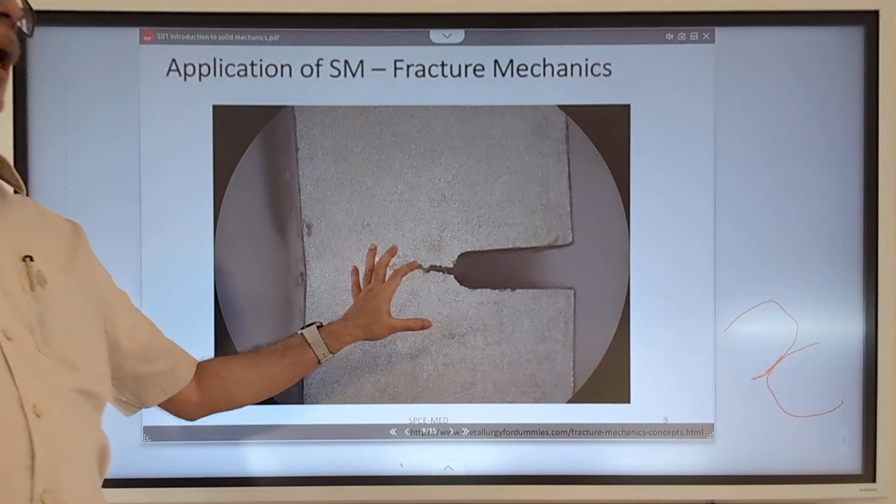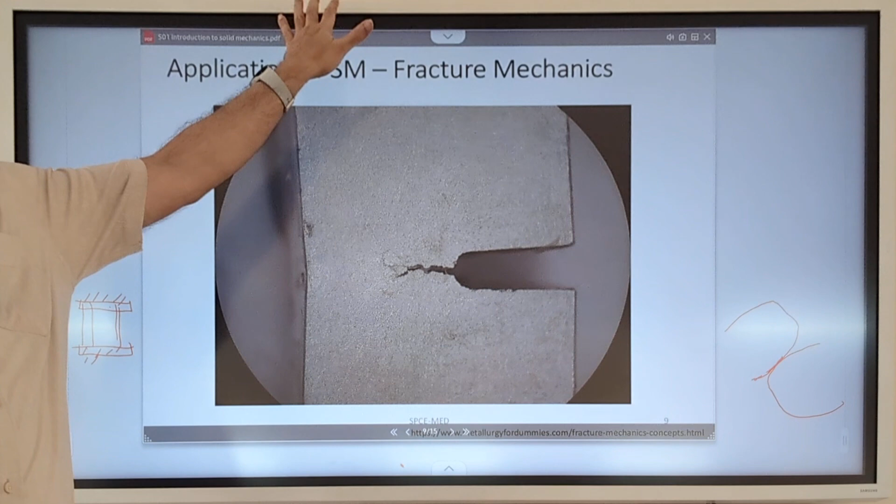No bodies existing in real life are defect free, so there are always some cracks or defects. Even this metal frame, which appears solid and sound, if you magnify it to a very high extent, you will find there are many cracks, defects, and deformities existing there. How do you deal with real life material which has got some inherent defects? Strength of materials doesn't consider the presence of these defects; they are dealt with in more advanced studies known as fracture mechanics.

We are going to look into that as well in this particular subject. In short, this subject deals with more advanced knowledge, as an extension to strength of materials knowledge, which will equip you to deal more accurately with the problems that you will be facing as an engineer, as a mechanical engineer.

When you go into real life, most of the ordinary problems will be taken over either by software or by some AI agent. They will do the routine calculations for you, and the report will come to you only for signature that they are okay. But what the machines or the AI or the software cannot solve is the basic fundamental principles on which those formulas or failure theories are based. That knowledge you will get in this particular course.

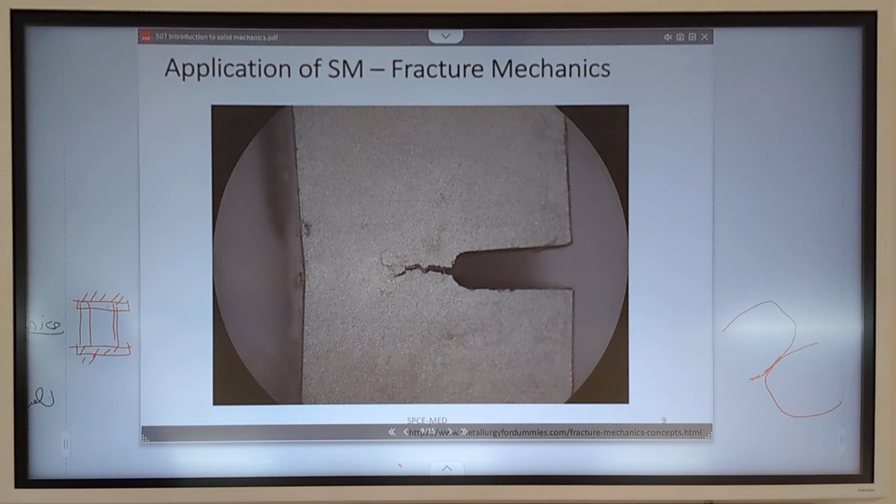In this particular course, these are the course outcomes which you can read from the course content. Whatever I have been telling you is written here in sentence form. This is what you will have by the end of the course—the skills you will gain.

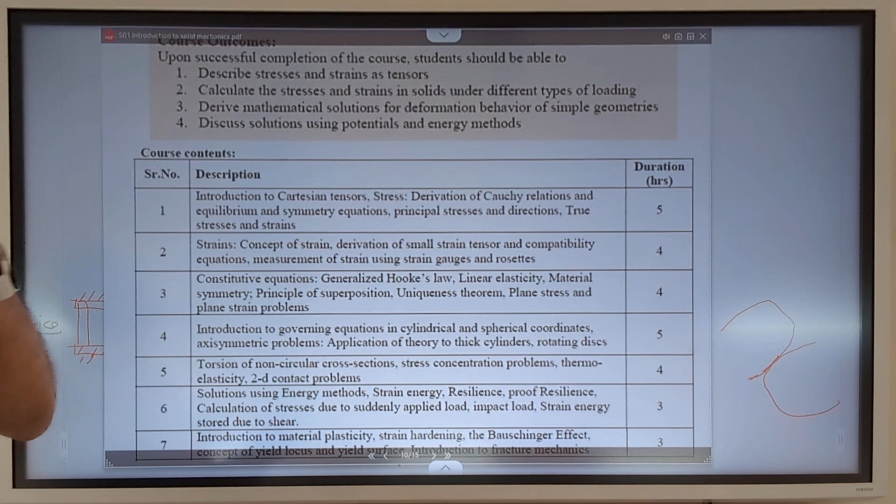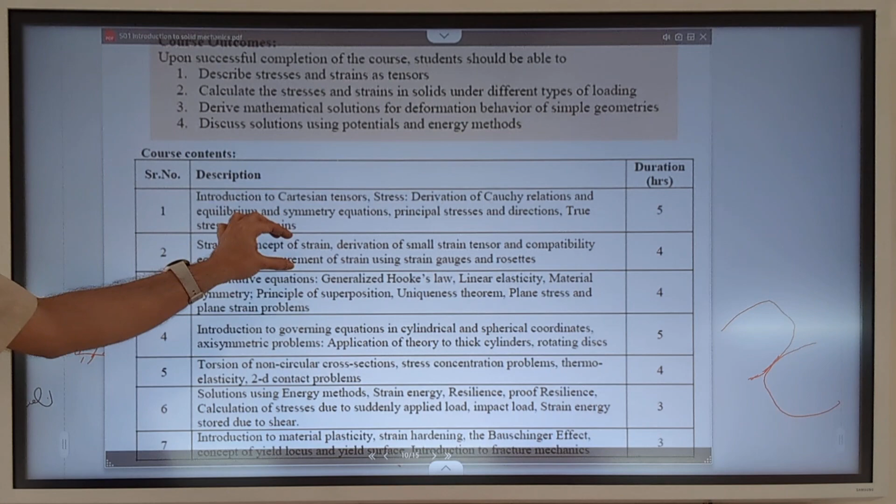Similarly, strain as delta L by L is the definition you have. We'll look more deeply into the concept of strain in the second module. In the third module, the relationship between stress and strain—which you've learned as Hooke's law, that stress by strain equals Young's modulus—we'll develop a more general approach for that equation.

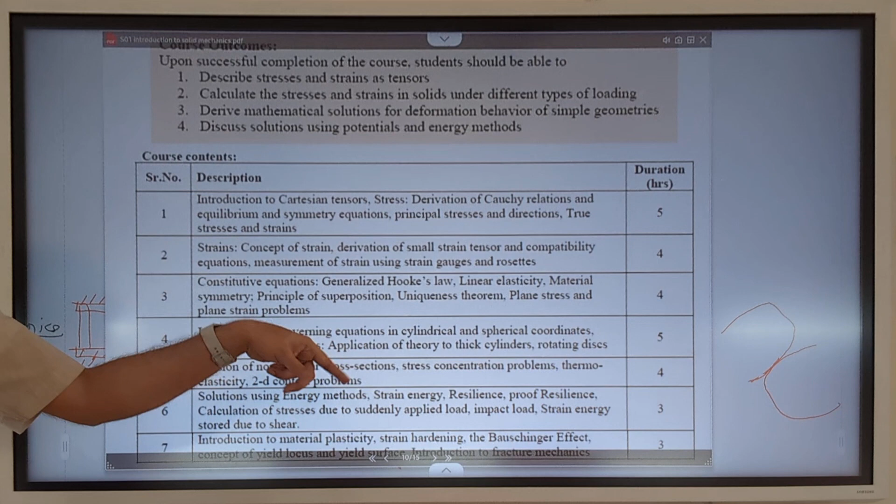In the fourth module, we will look into some simple mathematical modeling. If you have a cylinder subjected to internal pressure, you developed the thin cylinder formula in the previous semester. If the cylinder is thick, the formulation is different, so we develop the mathematical model for this problem and calculate the stresses.

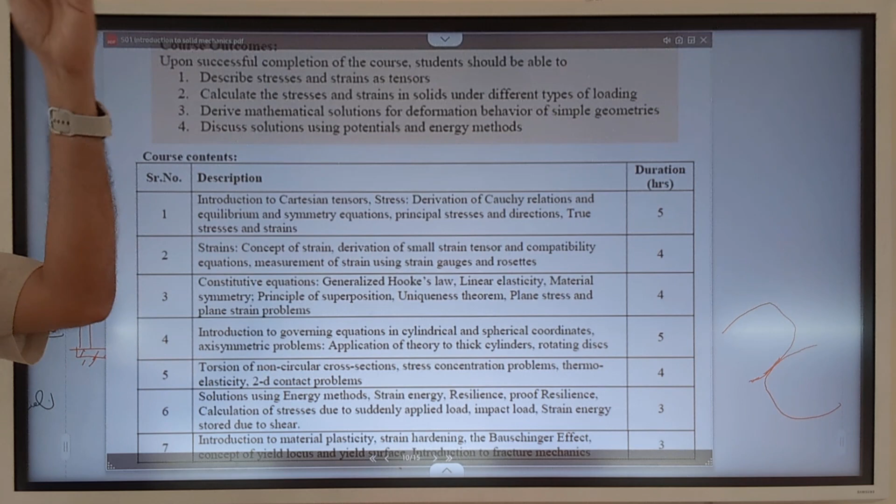The fifth module deals with many non-standard problems, like torsion of non-circular cross sections. For example, this fan blade is revolving but is also subjected to a kind of torsion because of the air drag acting on it—how do we calculate the stresses from that? Also the stress concentration problem: if this fan blade has a notch or scratch on its surface, what happens because of that?

And the contact problem, like the gear contact problem we discussed, and thermoelasticity—thermal stresses—we will deal with here.

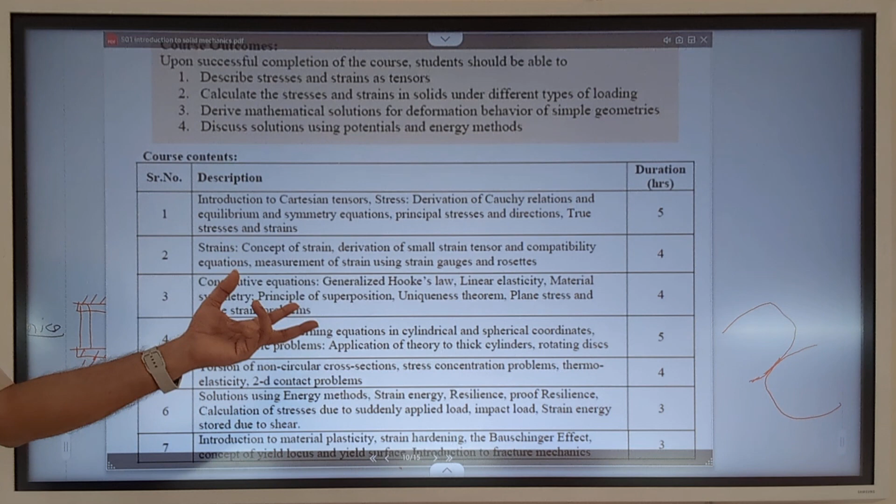Then a very powerful approach in any mechanics problem is the energy approach. Many problems can be solved in a relatively convenient way using the energy approach, especially for problems dealing with impact. For example, if I shoot a bullet at this fan or this table, how deep will it penetrate, and will it break the table or not? These problems are solved using what is known as the energy approach. That's what we will look at here.

The last module relates to more advanced topics, like how we deal with material plasticity—that is, non-linear behavior of the material—which we will see in the last module.

In this course, the most important takeaway is the course project. You will be given a simple problem—on the surface it will appear simple, but if you look deeper you will have more work to do. Throughout the semester, maybe in the next week or so, I will release this project. It has to be done at the group level, and at the end you will present your findings in the form of a report.

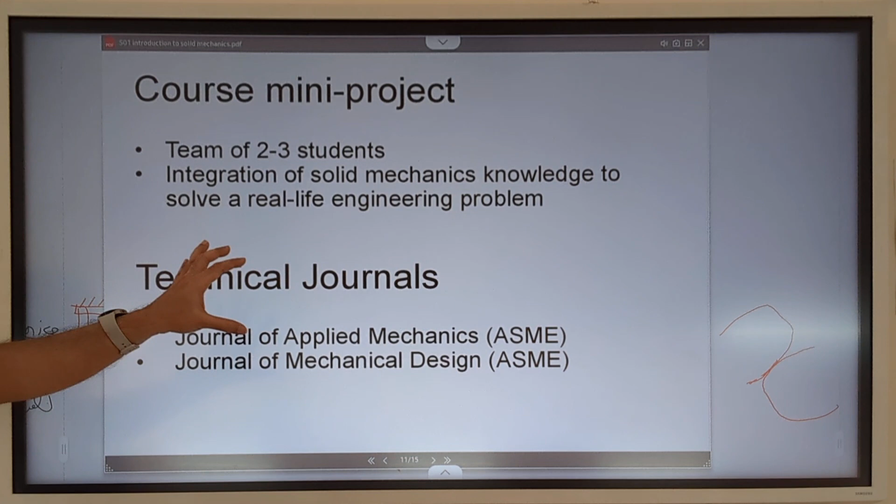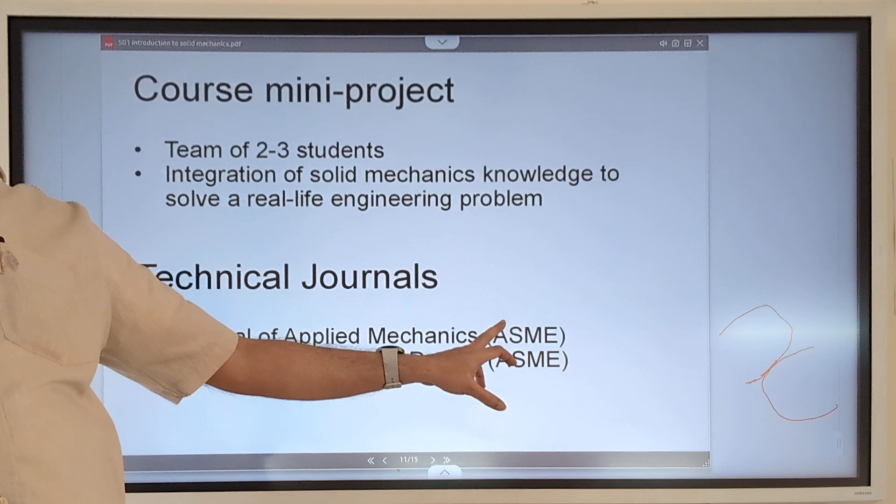For those more inclined to deeper study, our library has subscribed to very excellent journals related to this subject. These two are excellent journals, published by—does anybody know the full form of ASME? American Society of Mechanical Engineers. That is a very ancient body with a huge knowledge base about mechanical engineering. These journals will tell you the up-to-date information about this particular subject.

So we'll stop here for today, and in the next class we will deal with the actual topic—stress analysis—which we will begin with.